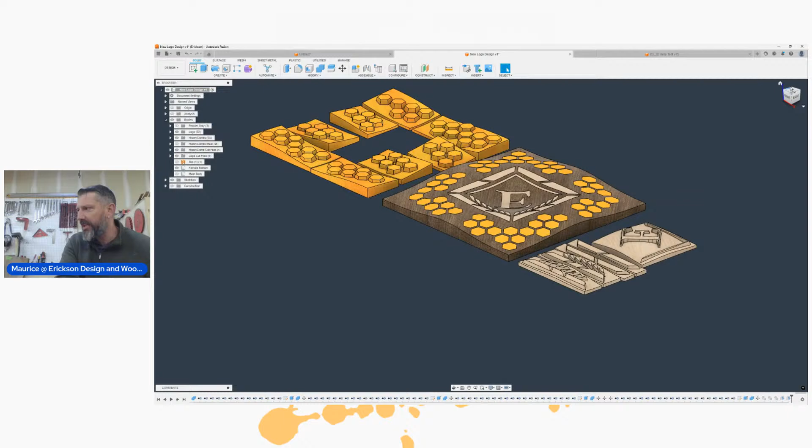I ended up redesigning my shop sign to make it look a little bit more organic. I'll share what this thing actually looks like now. What I ended up doing was flip the design where it's a triangle instead of a rectangular shape, and that turned out really well. I really like it.

That led me to a different design pattern for the honeycombs, and then I modified my company logo. What I ended up doing is making sure that all of this stuff would be machinable with my Bits and Bits engraver. This thing's super awesome.

It has two flutes, but the depth of cut is right around 0.5 of an inch, and some of these crevices are really deep. So I covered the workaround on how to do multiple step-downs to achieve that cut in Fusion.

There's a whole laundry list of stuff you have to take into consideration. It's all about machining these deep pockets, and this distance varies on all of the honeycombs. So there had to be a solution, and that video really did capture what that solution was going to be.

So that was good, that gets me back to where I need to be. When I get into the manufacturing side, I'm still working all the tool path generation and everything that's needed to do this. I'm almost finished with all the tool paths for the female body and everything that needs to go into it.

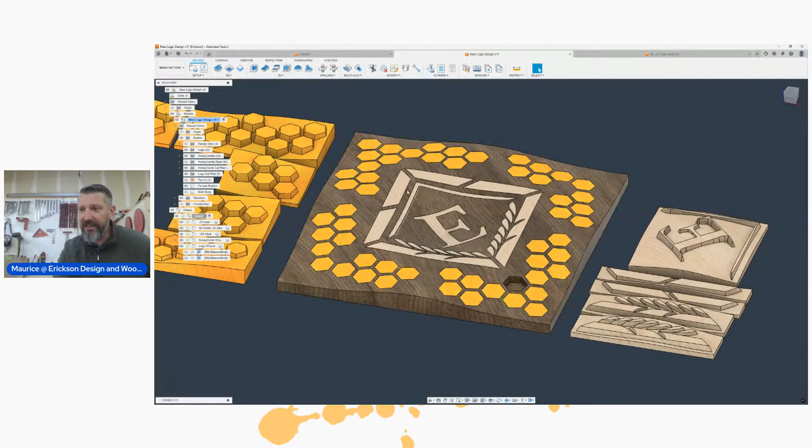Right now I'm about 10 hours for that cut. That is significant, that's a lot of time on the machine, not including all the other pieces that need to be machined. It's good, but...

That's where I'm at with that. But for this design-a-thon, I wanted to really look at how to make—I did that American flag puzzle, and I did a normal box for that.

I was thinking at some point I want to make a box that has an American flag that's wavy on top of the box for the lid, and then when you open it up, it shows the puzzle. For this design-a-thon, we're going to go ahead and make that box.

We'll do all the profile cuts and what that actually means. I'm going to use the same profile for the wavy surface as I did for the actual puzzle, so they'll mirror each other. So when you look at the box, you'll see the wavy flag that's completed and not puzzled.

And then when you open it, it'll showcase the actual puzzle itself. So we'll kind of walk through the design process on that.

Brooks, you asked about 2D versus 3D inlays—are the tool times much different? No. You're still removing the same amount of material, almost. In some cases you're removing less on the 3D design and maybe more on the 2D design, depending on what it is. But you're still just removing that material.

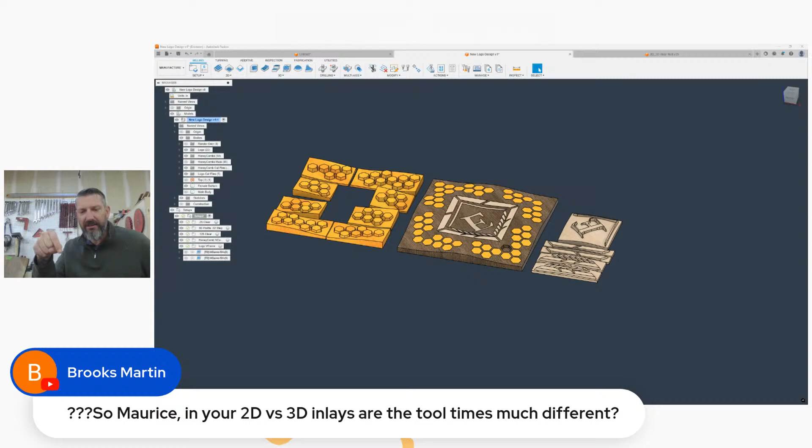So if you program your roughing passes with the pocket and then come around with that 2D profile, those machine times aren't really going to be that different. What's different is you have to go in and put that 3D profile back in. And as the tool goes back and forth with a really small step over, that's what increases the overall machine time.

So to do the profile on this, I think that was close to almost 6 hours. And this thing's pretty large, it's a 20 by 20 square. It's about three hours and 22 minutes, but you've got to times that by 2 because you end up having to do that profile again to cut the top off.

So yes, the 3D profile cut to get that surface, you're adding a ton of time to the overall project. Same way with the inserts, you're still cutting that 3D profile also. So the same bit, that ball nose coming in to do that 3D curvature, is still in there, and that still takes a bunch of time.

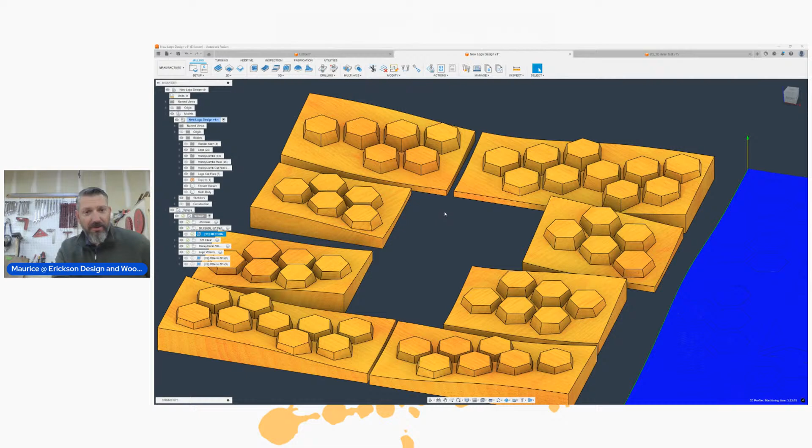So yeah, if you're going to compare overall, not just the pockets, it's considerably more. But again, it still looks really, really cool when it's done, and it's unique enough that you could justify a price difference based on the overall design compared to a 2D design.

In this case, for me, it's absolutely worth it, and I'm going to really enjoy hanging this on my wall when it's actually done.

Alrighty, so let's do something here. I'm gonna hide this, take this out, and go ahead and start prepping to look at this box design. Feel free to ask more questions throughout this, but I'm gonna start trying to get this design working.

Let's see, let's work on this. Let's find it here, I have so many different files and different drawings that it's hard to keep up with. Yeah, it's going to be this one. All right, we'll pull this up.

So this is the profile for the American wavy flag puzzle. Let me pull up the completed render. This is a pretty large file, there's a lot of bodies to this thing, so it might take a while to load.

There it is. All right, so each one of these is an individual puzzle piece that makes an American wavy flag. What you don't see here is any of the stars that are cut out. They're programmed into the tool paths based on a drawing.

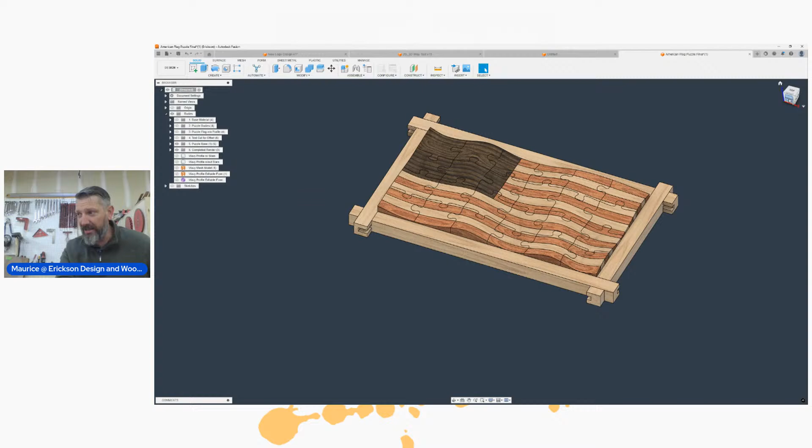So let's go ahead, we'll unhide this base. If I was to make this American wavy flag puzzle again, I know that the overall dimensions are good, and I made this before, and that's why the file is posted, and everything lined up extremely well within these parameters. So if I was to make a box, I know the dimensions for this thing to fit in.

I can measure everything off of this model, and it's going to be good. So if we know these are our known distances for what's going inside the box, really all I need to know is the dimensions allocated to these bodies, these renders, and then the overall thickness of my box walls that I want, and then the overall height for clearance. That will give me a good base for this to sit inside, and then also the lid to come down and actually look at this thing.

Let's go ahead and do some measurements really quick. The inspect tool is super awesome, I can measure an edge or measure points to get overall distances of what I'm looking at. So if I was to select this edge, it doesn't go all the way across because there's cutouts inside this. So if I click this point and this point, it will give me the overall distance of 14.5 inches.

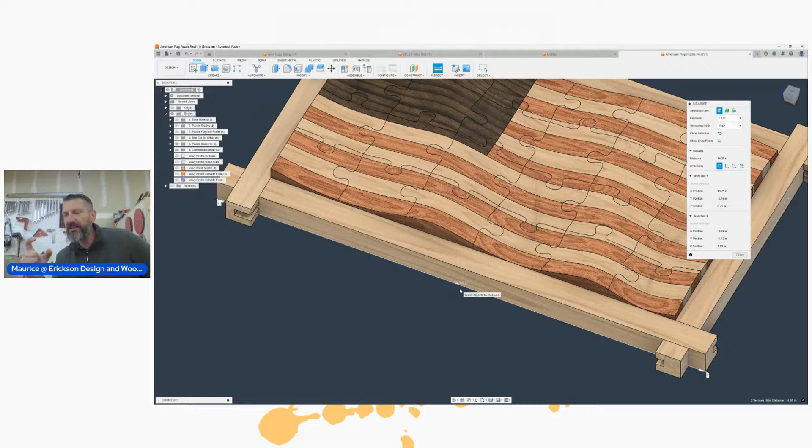When I draw these things, I draw specifically to known dimensions. And if I like this distance, it's easy to look at and understand how to design the box, not taking into account any tolerances. So if I was to design an inside box that was exactly 14.5, when I slip this entire thing inside of it, it's probably going to hit and it's not going to fit.

And what I don't want to do is start doing some beer math in Fusion 360 trying to account for that. The easiest method to make sure this box fits is when I make these inserts, I'm just going to take it to the table saw and cut it short. So I can still have really good dimensional material that I can design with, and then account for those tolerances later when I'm just trying to make it fit, and I can shave off just a little bit. You'll never notice that this thing was not exactly 14 and a half. If it was 14, you would definitely notice.

But if I was just to take a 16th inch off of this edge to make sure that this entire thing fit in that box, I'm good to go. There's no concern there, and you'll never notice it. Unless you're a perfectionist and you have a tape measure out and you'd be like, nope, this thing is not 100% the dimensions that you said it was going to be. There's some people out there like that. And unfortunately, you just gotta play with it a little bit.

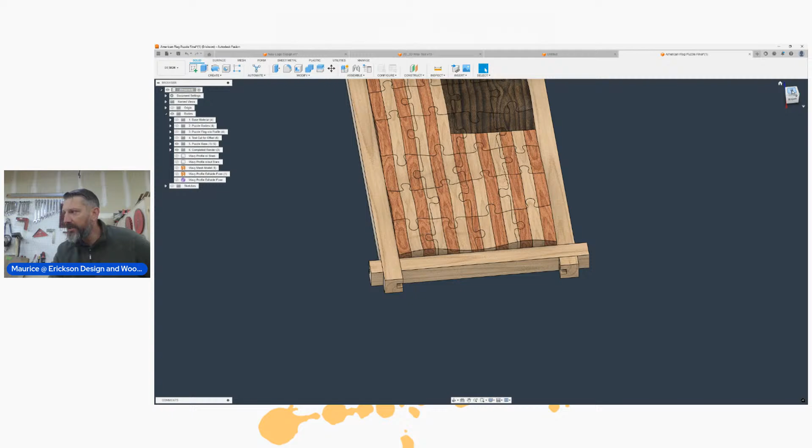So let's just go to the top view here. I'm going to create a new drawing, and we'll go ahead and hide this body quick. I'm going to hide these sketches. I had some stuff visible here. Let's work only off of this box. And you can see that the plane that I'm working off of isn't there. That'll be a little bit of a challenge later on once we start making sure the height differences are good.

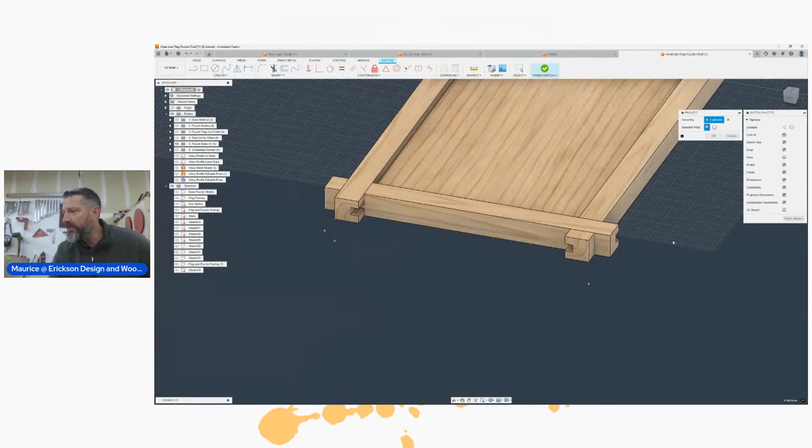But what we can do is project these points that I need to hit. So let's go ahead and select all these bottom edges. We're going to use the project tool, and I'm going to project this edge down to my sketch. When I click on it, you can see that there's a little icon there. Even though I'm above the surface, when you look down at it, it projects it down to your drawing. We'll do this one, this corner, this corner, just to get those dimensions here, and the last one. I'm going to hit OK on that.

I have to bring up this new sketch that I have. Okay, so now I'm going to hide these bodies since I know where that model is located. Let's draw a box, but I'm going to go from this point to the middle of that. Then I'm going to do the same thing. All I'm doing is hovering over it and then hovering over this point, and it will give me my center points along that edge. So there's my box, and we'll double check the dimensions. This should be 14.5, which it is. I'm going to hit OK. And the same thing for this, this should be 9. Yep.

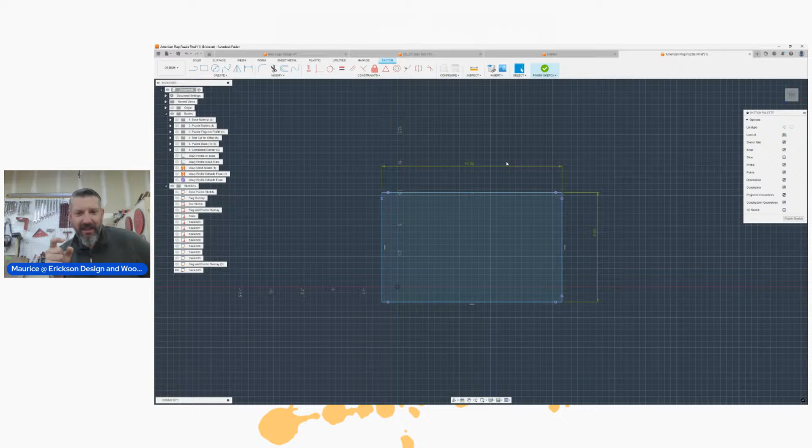Okay, so now another critical dimension that we need to understand: the overall thickness of the walls of my box, each side and the material that I'm going to use. I like to make the boxes 1/2 of an inch thick. That makes it really simple, and when I process the wood, I can hit that 0.5 pretty easy. I'm removing a lot of material. I'd like to go to like 0.75, but again, there's so much material there, and it's heavy, and it doesn't feel like a normal, slick box. So I like to use 0.5, and for this, that's what we're going to use.

So I'm going to go ahead and use the offset tool. I'm just going to select the entire box outline, and then I'm going to increase it by 0.5.

A negative 0.5, just to get outside the box. I'm going to enter on that. So there is my overall thickness and dimensions of everything that I need to cut. And I'm going to miter this, and what I can do is I can just put in the miters right now at a 45. This will be each side, each face of the material that I'm going to make in the garage. So now my overall distance of everything that I need to cut, whatever material I'm going to use, is 15.5, right? That's the outside of my miter cut that I'll do.

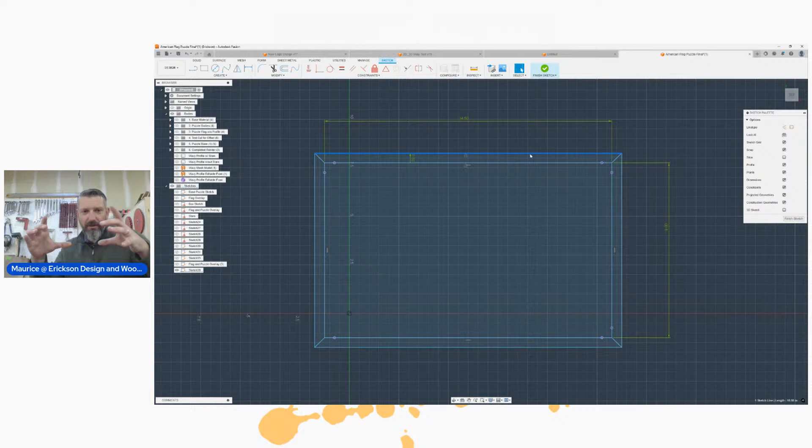The other thing that we need to figure out is how we're going to produce the top of the lid structure of the American flag and how we're going to input that into the box. And I like to rabbet and shoulder and do that type of joint where it slips right in and everything is held and all the edges are really good. So to do that, I'll end up leaving a shoulder of 0.25, and again, I can use the same tool that we did, the offset function, and I'm going to select all the corners again. And then I'm going to take this a negative 0.25. I'm going to hit OK on that.

There is my overall dimensions of the American flag that I need to hit to fit into those shoulders and that joint of that box based on the thickness being 0.5 and then enough distance for whatever I'm going to put in the box to go into it. So those are really the critical dimensions that I need to understand and design off of, which is good. So let's go ahead, and I like it. So the flag distance will be 15 by 9.5.

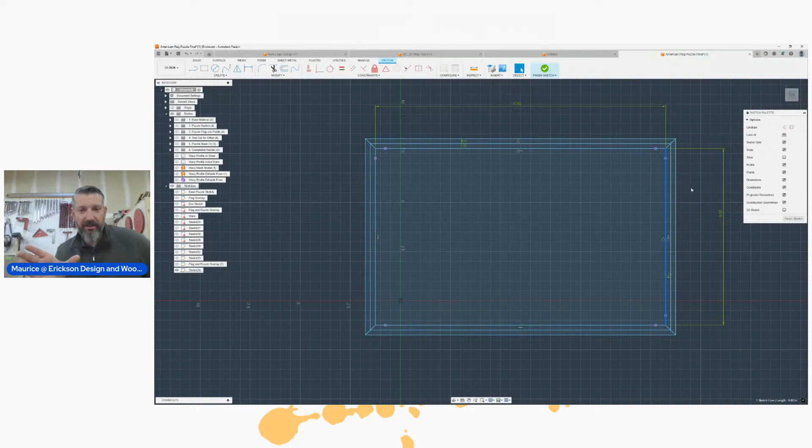And we've got to really think about how that interlaces. So the American flag will be visible on this line. So when the sides come up together on each side, and the rabbets are underneath, this is my show of the entire top of that box. So really, it's 14 and a half by 9. That is the overall dimension of the American flag that I need to make. So that is good. I like that. So let's go ahead and we're going to finish this sketch.

And now the second portion that I really need to understand is how deep I need to make everything, as far as the overall thickness of that box. If I remember right, what we can do is bring back the completed render of this. If I know this is my bottom, I can draw a sketch off of this plane. Oops, let's try that again. If I know this is my bottom, let's do, yeah. We'll just measure from this line.

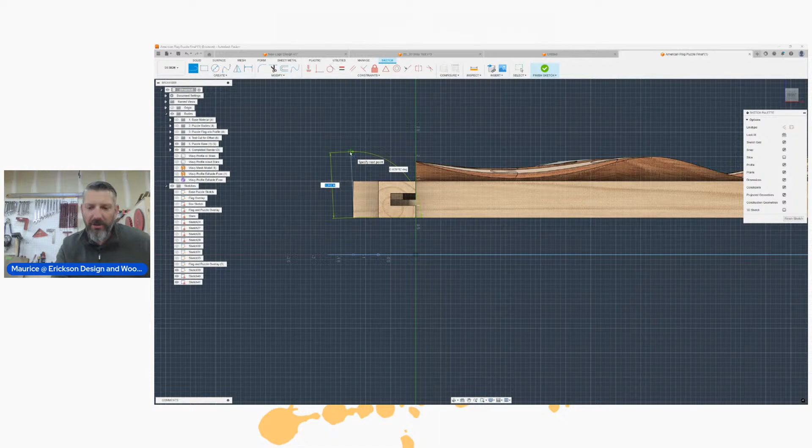So I need to understand that my clearance for this object to go into the box on the bottom side needs to be at least, I'm going to round up and say, at least 1.5 inches. What I also need to do is account for the box lid. So if I know my clearance, let's go 1.5. And then for the lid, I want at least 1/2 inch. Let's go 0.5 to the top of my lid. This gives me my overall dimension from this to the bottom.

And then what I'm going to leave, let's use 1/2 inch material for the bottom. Yeah, that should be fine. So the bottom portion of the box will be 0.5. The American flag, what I'll probably do is make it 1/4 inch thick. Well, maybe we should do more than that. Yeah, no, I think that's good. 0.5 plus another 1/4 inch. Let's do 0.25. So my overall thickness should be 2.75 as far as the depth of that box.

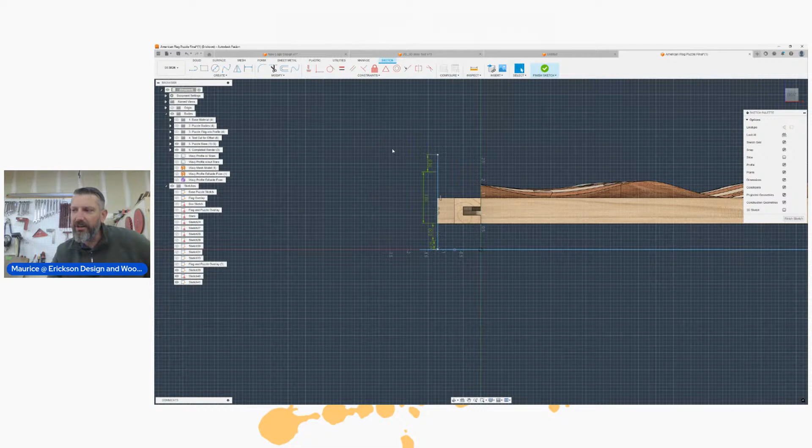So let's go back here. We can verify these measurements later, but 1.5 inches for whatever's going inside of it is probably good. I left enough material for the actual American flag to slip in, and then enough at the bottom for the base of the box, plus an additional 1/4 inch of material. So 2.75 sounds about right. So let's go ahead and we'll hide that sketch. We'll save that for later.

And then what I'm going to do is extrude these walls up. So I'm going to do both, this inside corner and this. That's my 1/2 inch. Let's just make sure I hit all of it. Yep. So we'll bring this up to 2.75.

And then we're going to make sure we click new body, and then this will be for the other side also. So that's 2 sides. Let's bring the sketch back up. Oh, I don't have my history on. Okay, I disabled my history. I'll have to go back in and fix that later. That's fine though.

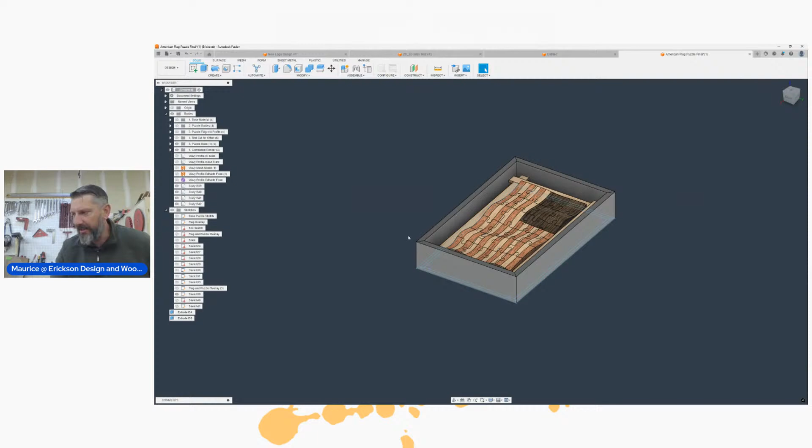Ooh, there we go. And then we'll do it for the other side. And this will all be new bodies. This will be 2.75. We're going to do new body. And same for this side. All right, we'll hit OK on that. And there is the walls for that.

Now for this thing, what we're going to do is we're going to concentrate on making the top portion and have enough room for each rabbet to go in, and we'll design that American flag. And then we'll put a wavy surface on it. And that should be pretty cool. So that is actually right where we need to be.

Again, these tolerances are really tight. I'll take my table saw and I'll whack off maybe a 1/16 of an inch. That will give me a 32nd on each side of clearance. Super good. For this, I don't have to do that. And that's really, really important. You know, if I was to put an additional 1/16 of an inch on this to account for that tolerance, then everything gets really wonky.

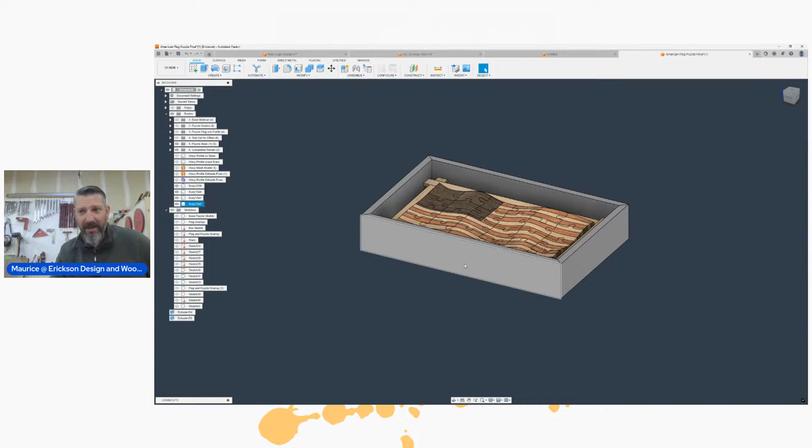And then when I get in the garage, I know that I gotta cut that. And it's easier to cut 14.5 than it is 14.5 plus a 16th, you know? So I'm trying to make life easier in the garage when I go through this. And for every action that I do here, I'm thinking about how I'm actually going to do this with the machines that I have and the capability I have in the garage.

That's really, really important. If I design something in here that I physically can't do in the garage because I'm missing a tool, that puts me in a position now where I'm going to have failure on the project, or I'm going to have to go buy something. And if I know the tools that I have in the garage, and whatever I'm working with is capable, I'm good to go. So I really keep that in the back of my mind when I'm going through this.

So let's go ahead. I'm going to hide this. Yeah, let's hide this and we'll just work with this now. Let's go ahead and yeah, I like it. We'll use this top portion. So now what I'm going to do is I'm going to draw a sketch off of this face. And then I'm going to draw a new box. And I'm going to go off of this point.

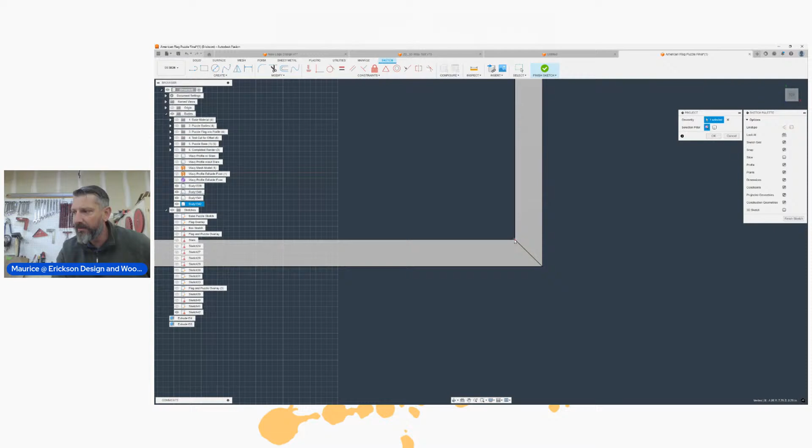And because I can't click on that point, I'm going to take this point and I'm going to project it to the drawing that I'm at now. So I'm going to use the project tool again. And I'm going to project this corner with this corner. Now I'm going to hit OK on that. Now I can snap based on the drawing that I want to this. And I like it.

So now what I'm going to do is I'm going to offset this 1/4 of an inch for the overall depth that I need. So let's go ahead and yeah, let's go 0.25. I'm going to hit OK on that. There is my shoulder or rabbet. That's going to go in and join those two together. And then, so let's go ahead and I'm going to hit OK on that.

I'm going to drop this down. I'm going to drop both down though. And I'm going to go down. Let's see. Did I say 1/4 of an inch? And let's do 1/2 of an inch. I think that's achievable, what we want. Yeah, I should really do, let's do 0.75. I'm going to run into what's going to get put inside there, but we'll fix that later.

I'm going to make this box just a little bit bigger. I'm going to go ahead and do new body, so it's not cutting into these corners. And that is good to go. So the overall thickness of the top of that lid is 0.75 of an inch. Now let's go ahead and cut this corner, but I'm going to hide these corners.

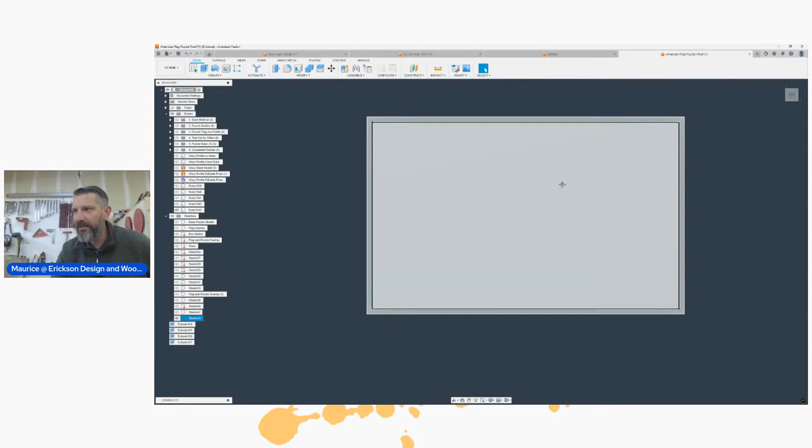So what I'm going to do is I'm just going to leave a 1/4 of an inch. I'm going to cut a rabbet, and there's going to be a 1/4 of an inch of material that's left over. So since I clicked this, let's go down 0.5 of an inch. That'll give me my 1/4 inch rabbet. All right. So let's hide the sketch. There's the top of my box.

Now what I can bring in is these corners. And what I'm going to do now is I'm going to cut that rabbet into each one of these sides. The easiest way to do this is I'm going to use the combine tool, and I'm going to use the cut function. So I'm going to click the cut, and I wish I could choose multiple bodies to do this. I have to do these individually, and sometimes it does take a while. But for this, there's only 4, so it's not bad.

So the target body that I want to cut is going to be each side of these corners. Let's see if it will do this. Nope. It will only let me do one. So let me select this. The tool body is going to be the top of this face. And what it's going to do is cut that notch that it overlaps into it. So I'm going to hit keep tool and then hit OK. Let's hide all this stuff, and we'll see what happened. So you can see now that it cut that into it.

Now, again, we talk about tolerances. All I have to do is just take that to my table saw and just shave the inside of this corner on this box, maybe a 32nd, maybe a 16th, and I'm good to go. I will never run into that. But for modeling purposes, I can butt this up and not account for any tolerance, and I'm still good to go. When I get into the garage, I got to really think about that.

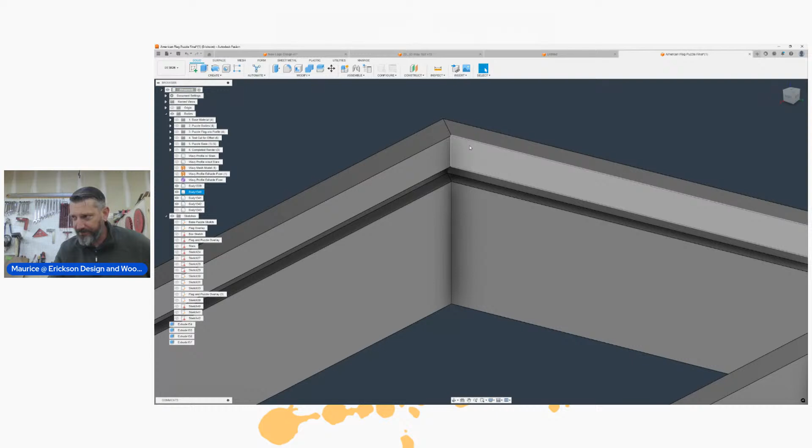Sometimes I'll use my dado. It all depends on how much time I have and how quick I can do it. When I go through the dado, it takes a while because I have a SawStop and I have to take out the cartridges, and there's a whole laundry list of stuff. But yeah, there is my 1/4 inch rabbet for my box lid to slip into.

Now let's make this look like an American flag. So I know those are my sides. I'm going to hide those, and now we're going to start working on this. So the American flag, let's see. There's 13 stripes. This is 9 inches that we got to work with. So let's do some beer math really quick. I'm going to create a sketch, and I'm going to use this top face.

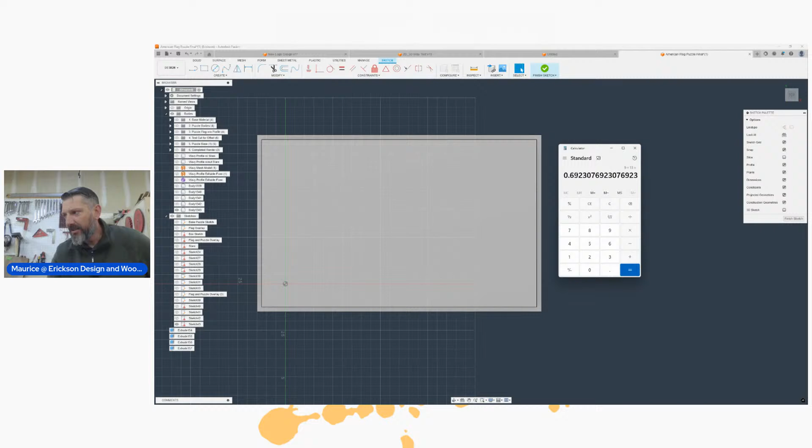And let me get my calculator out. Calculator. There's a generator online that will give you the exact dimensions of what you need to work with, but for this, we'll just do it on the spot. So I know I have 9 inches to work with. I have 13 stripes that need to fit in here equally spaced. So I'll take 13 divided by 9. That's going to give me, well, no, I did that wrong. 9 divided by 13. So each one of my stripes needs to be 0.69 of width.

Yeah, that's a hard dimension to get to when you have to cut all these stripes of wood out. So let's say that's going to be pretty close. Let's go. Yeah, we can use that dimension, and then I'll work around that a little bit. Let's go 0.7. And what I like, I have a drum sander.

I can't stress it enough to get a drum sander, because you can really control when you're removing material better than a normal planer. So if I need a critical dimension of say 0.7, that's what it needs to be. And that is super nice to have, and it makes it very easy. So yeah, let's do that.

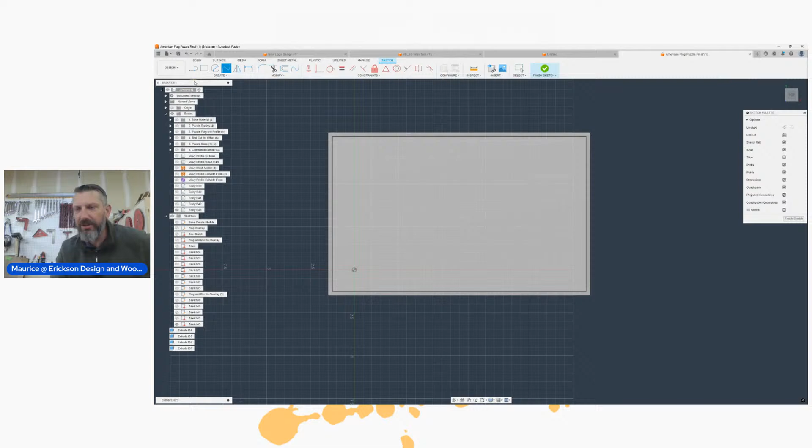So let's go ahead and we'll draw. Let's draw. Why isn't it clipping onto that? Should. Let's go back. Let me project this really quick. Project. We'll do these corners again. Oop. And yeah, I'm going to make just an overall box. And then what I'm going to do is I'm going to take this down 0.7. Yeah, 0.7.

Now what I'm going to do is I'm going to take my rectangular pattern function, and I'm going to click this box that I just made. And I'm going to bring these down. I'm going to evenly space these of 0.7. Oops. Don't want to go that way. I want to go down. And let's do 13. There's my 13 stripes. And you can see I had a little bit of overhang. That is very small, and it doesn't matter. So let's go ahead and we'll hit OK on that. Those are all of my stripes.

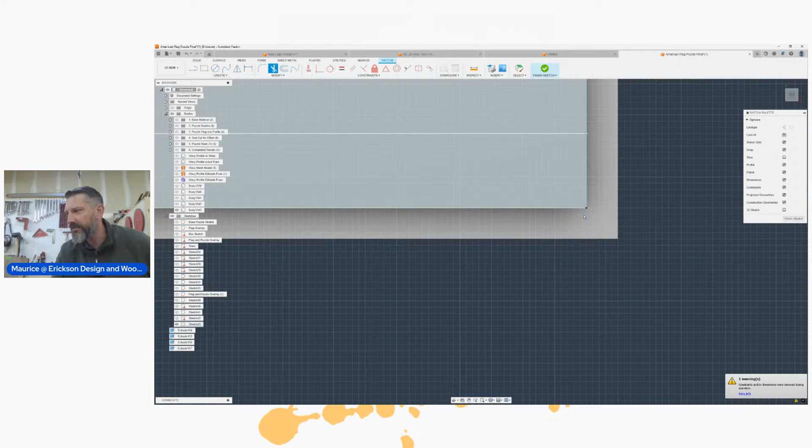I'm going to cut this off. So with the trim tool, whoops, go back to my sketch. With the trim tool, I'm just going to delete these out. We'll go back out here, and we'll delete. I'm going to exit out of that tool. Now what we need to do is I need to know what the dimension of the union needs to be. So let me pull this up. American flag dimensions. And then we'll do this flag calculator.

All right. So hopefully you guys can see this. Let me pull back up my main screen here. Oh, actually, give me a second here, guys. There we go. All right, let me pull this back up. Let's go.

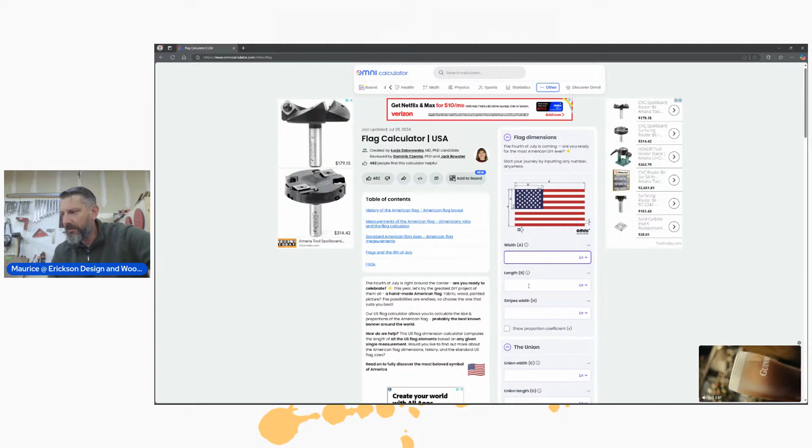What was that, 14.5? And my width was 9. So this thing, it's hard constrained, so I can't really control. So if I know my B value, that's 14 and a half. So the union should be 4.11. I'm going to go with 4 inches then. I'm going to keep it a whole number. You'll never notice that 16th of an inch difference. A lot of people struggle with that. And at the end of the day, you don't have to get too crazy on a lot of these things. So if I know my overall length needs to be 4 and I need to come up, let me just double check this.

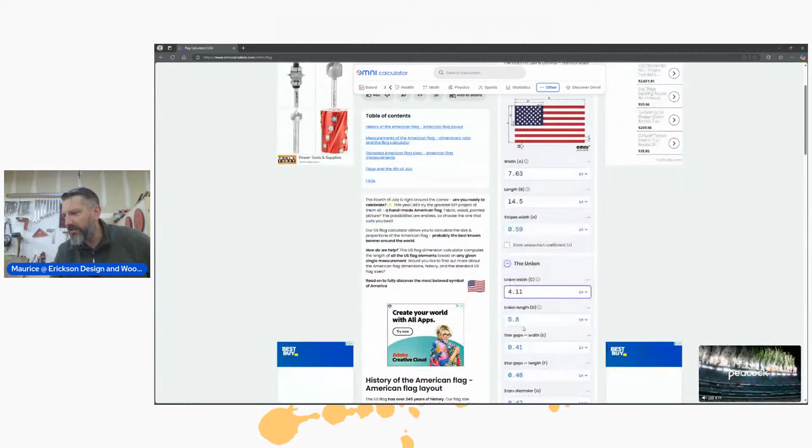It's 1, 2, 3, 4, 5, 6, 7. Well, on the 6th one, it needs to come down. So 2, 3, 4, 5, 6. So it needs to come down 1 more. That definitely does not look right. Let me exit out of that. Let's see. 14 and a half, and it's showing the union length, that's what it is. So this is the dimension that I'm looking for. 5.8. If I'm at 14.5, let's keep it at 5.75.

5.75. Not that one. Let's try that again. 5.75. Oh, this thing is kicking my butt. I don't know why I'm doing that. 5.75. All right. And that should give me 1, 2, 3, 4, 5, 6 with 7 on top. All right. So I'm going to click that corner. And then I'm going to go ahead and delete these lines. So let's go ahead and we'll take this out, take this out. I'll delete each one of these.

Get out of that. And then, yeah, this should be good to go. So there's my union, and here's all the stripes that need to be put in. Still kind of looks funky to me.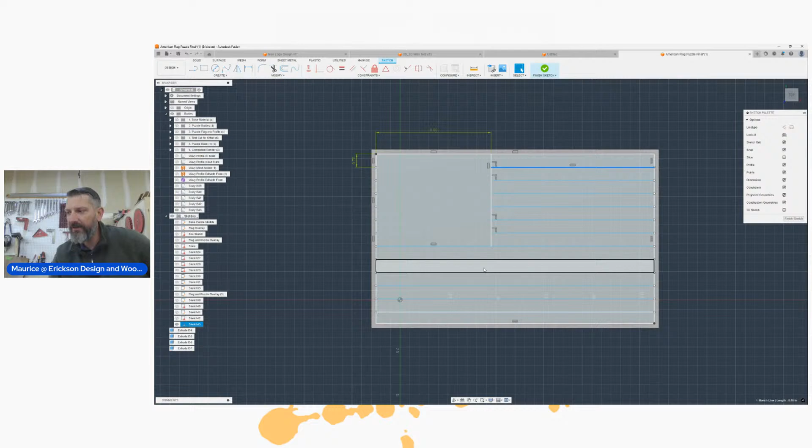5.75. You know what? Let's go 6. I like that, make it a little bit longer. So if that's 6, then each one of these lines will be 8.5. So 8.5 for these widths, 14.5 for these stripes. And then the overall distance of the union is 6 by...

4.9. Okay, I like it. So that is the overall distances of each one of the stripes I have to make in the garage, plus the union.

Let's go ahead and we'll finish this sketch. And then what I'm going to do, to make it look like the American flag, that way everybody knows what we're making here, I'm going to go ahead and extrude these downwards.

Actually, there's an easier way to do this. So let's go ahead, we'll click all these, it's fine. And then we're going to go down 0.75 or 0.5. I'm going to cut those out, and I'm going to pull my drawing back up, and I'm just going to extrude these down. And I'm going to show you why we're doing this.

Oh, you're saying, okay, yeah, that makes sense. So we can go every other one. These are all new bodies. Oh, I'm going to repeat. I'm going to do that again.

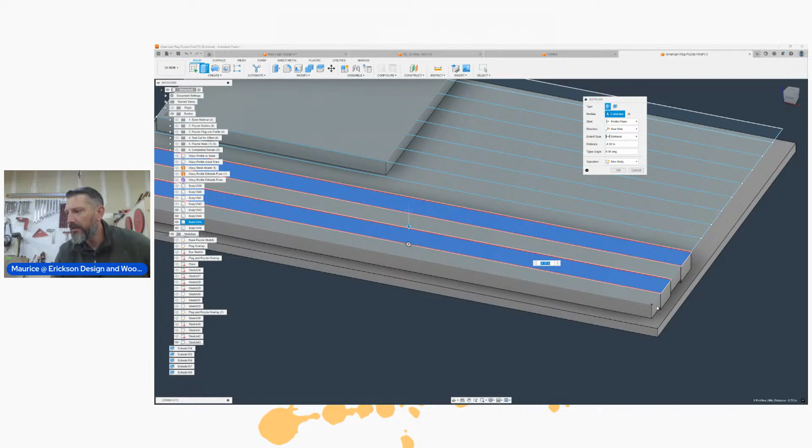New bodies. Let's go 0.5 down. New bodies. Oh, I didn't go far enough down. Since I don't have my history turned on, I can't go back and do that. So I'm going to hit the edit undo button.

All right, let's do every individual star. Let's do it this way, this will be a little bit quicker. Go down to negative 0.5. And these are new bodies.

I'm going to repeat the extrude, and I'm going to do these stripes. We'll go negative 0.5. We'll do new body. And we'll do the same thing for the union.

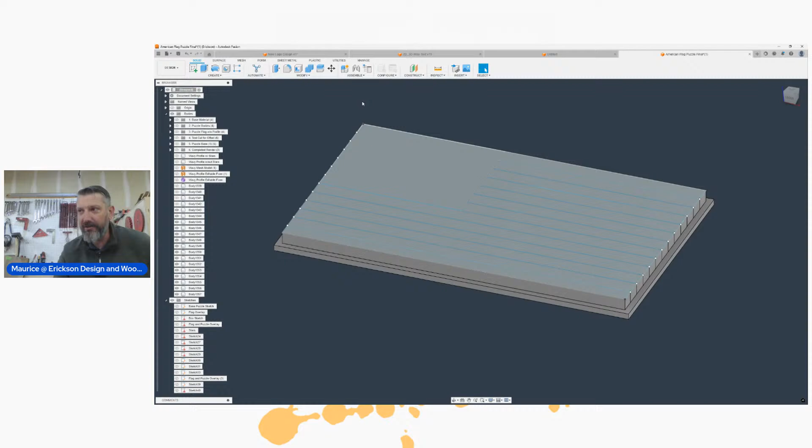All right, let's get some material. So the reason why I didn't join all this together onto this bottom is I'm going to put a veneer backing. That way you can't see the stripes on the inside of the box, and we'll kind of look at that a little bit. It only has to be a veneer sheet, you don't really have to do anything crazy.

Let's see, yeah Brooks, that's exactly what I got too. And just to make life a little bit easier on me, going that 0.25 difference for the union to get the 6 inches really does help minimize the amount of mistake that can happen when I'm cutting all this material out on my table saw. Same way with the 4.11. And because I increased the distance here, and it's a little wonky, but it's so close that you really can't - you'll really never notice it unless there's a purist there who'd be like, yeah, your dimensions are off.

I haven't run into anybody like that yet, but you never know. So I'm taking a little bit of risk and getting outside the regulation dimensions of that flag. But again, can you notice it? Is it something you've got to really pay attention to? It's hard to say. But let's go ahead.

I'm going to hide all this sketch drawing, and then let's go ahead and put some material on this, some appearance. And yeah, that's good. So let's put walnut in.

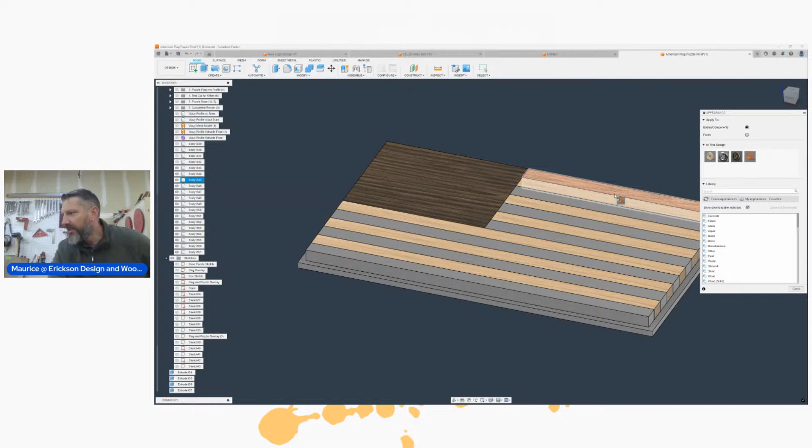And then we'll come in with the cherry. I'm going to use Padauk because it gets a really nice red color. But for the design portion in here, this appearance, it's easier on the eyes to use cherry, and it looks like a contrasting red color.

Now what I'm going to do is I'm probably going to use a darker veneer on the background or the bottom of that lid. So if I know that I'm going to veneer this, I'm good to go. So let's go ahead and let's pull up the sides of the box again.

And for the box, we'll use maple - I'm going to use big leaf maple for the outside of this box. It's highly figured, it's super nice. I need to input the textures in here that shows all the figured wood that I have, and I need to eventually do that at some point.

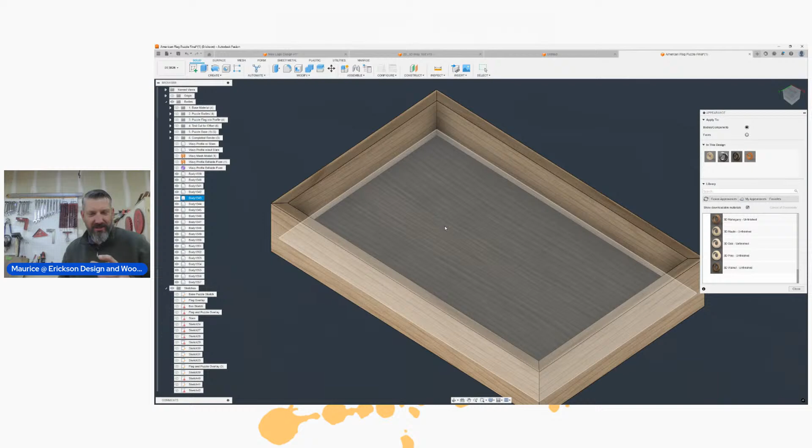But so the inside of the box, when you flip the lid open, you won't see that American flag. It'll be whatever material that I use to veneer it, which I like - I don't want the American flag to show on the reverse side. There's going to be no stars on it, it's going to look wonky. And so veneering takes all of that out, I don't have to worry about it.

All right, my coffee is cold, so I'm going to graduate to a Red Bull. I like to drink energy drinks when I go through all the design work because it keeps me focused.

Okay, I'm going to hide all the appearance stuff. Let's go back. Now, the critical thing is I know all the dimensional material that I need to cut by material. So the Padauk, I know exactly what these dimensions need to be to fit inside this box. I know what size the union needs to be, and then all the white stripes for the curly maple that I'll use.

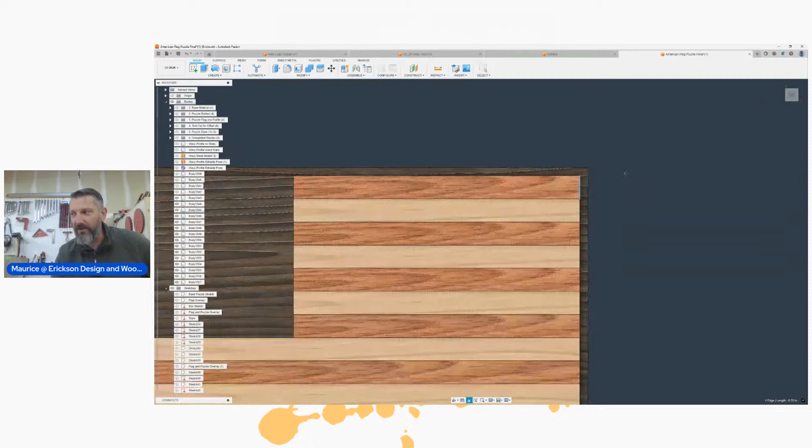What's not accounted for is this additional rabbet that I accounted for. So let's hide these sides. Technically, I need to account for this 0.25 in this distance on both sides. So this top portion, if this is 0.7, I need to add 0.25 on this side and on this side to account for when I machine this rabbet into it. Same way for this one, if I cut it 0.7, I need to add to the overall length of this 0.25 rabbet that I'm going to cut. So I got to do that for each one.

So I'll have to take really good notes, and when I get in I'll account for it. Technically, this will be the overall dimension for all the widths from this point to this point. And then when I do my veneering on the back, you won't see the actual stripes, but this will be stripes technically. So I don't really have to model that unless I want to. For this case, I'm already accounting for it, and I took that mental note. I'll know that this stripe is 0.9, or 9 inches of length, that I got to cut, and then I got to account for an additional 0.25 for this thickness.

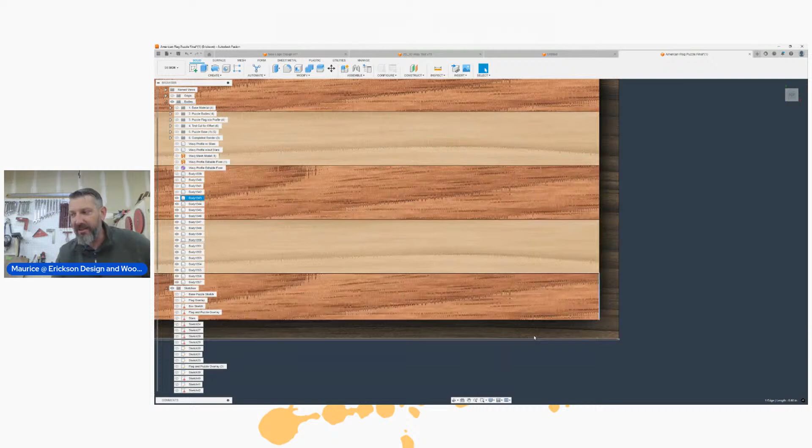Everything else maintains its 0.7 distance all the way down, except this one, and this one actually got kind of wonky. So if this was 0.6 plus 0.25, I got to make sure I machine that to 0.85 width, and then get my overall distance or my length on that. So I hope that kind of makes sense. I took a mental note of that where I have to do that in the garage.

But that gets me to my box. Now the fun part: I'm going to machine a contour all the way on top of this so it's wavy. To do that, I'm going to use this mesh that I already have, and I'm going to scale this to where it will cut the profile of this on this box.

So what I'm going to do is I'm going to copy this. I'm going to right click, let's copy, I'm going to go back. I'm going to paste this in because I don't want to mess with it — this is associated with other cuts, and I don't want to mess with it. So I just made a copy, and then what we're going to do is I'm going to position this.

Just touching that top surface. Same way with this, so that is technically good. I'm going to hit OK. Actually, let's go with top view, and let's get this centered into the material. It needs to come in. Now it looks about right.

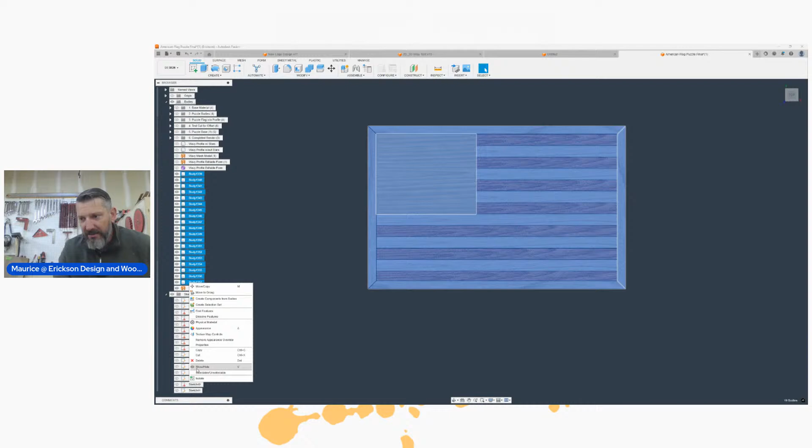So what I'm going to do now is I'm going to hide all of this stuff. Let me highlight all of it. Let's go ahead and hide. What I'm going to do is I'm going to scale this. So let's go to modify, we'll go to scale. Oh, why wouldn't you do it in the middle? All right, that's fine.

Let's bring this back. Unhide this. Of course that wouldn't do it. Actually, let me do it with a sketch. Not that one, this one. Let's see here. Man, I can't select that base.

It's fine, there's an easier way to do this, but for this let's just do this. So let's go ahead and we'll scale this. We'll hide this base so I can select it, and then we'll pull this drawing back up. All right, let's scale this thing. That's going to be pretty close. Let's move this.

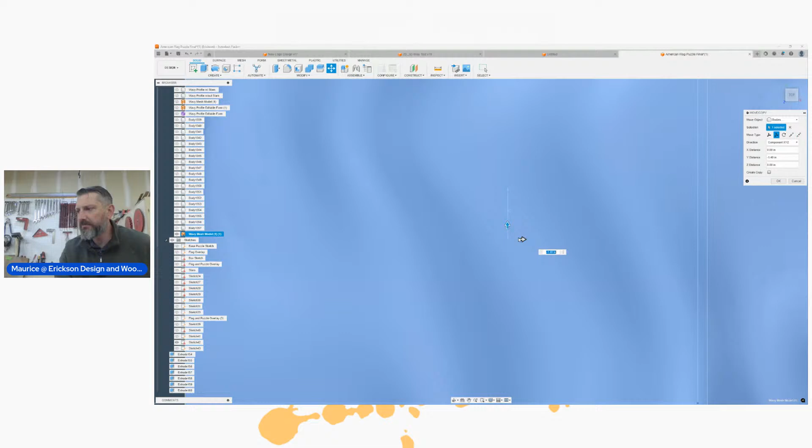Ew, yeah, see I got really wonky with my measurements here. All right. Hit OK on that, and then we're going to scale this one more time. Hit OK on that. And this thing got really, really wonky. You know what? I think that should be fine, because right now I'm just looking for the profile.

All right, let's go ahead and let's bring all of our bodies back up. We'll unhide all this. Ew, look at that. Little too big.

Hey, what's up, John? Appreciate you joining us.

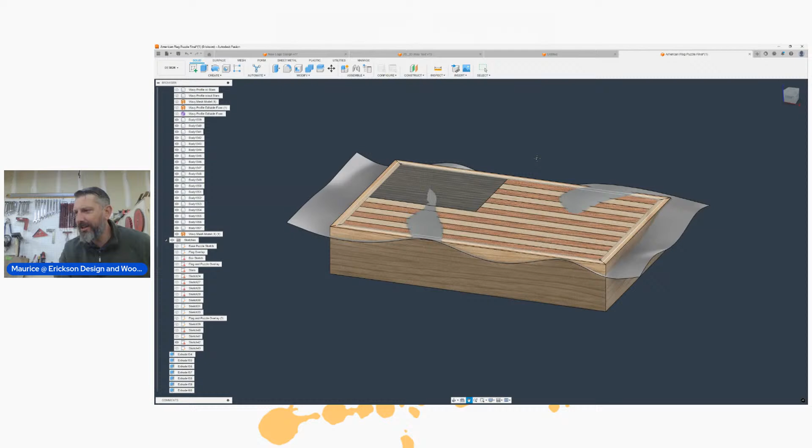Right now we're trying to make a wavy flag box, almost there with it. So I'm going to bring this down just a little bit because I don't want to cut the top portion. Go a little bit more. Let's bring this down just a little bit. I think that's the closest I'm going to get.

All right, let's check one more thing. Let's hide these boxes. And let's see, ooh, look at that. That is not going to work. Okay.

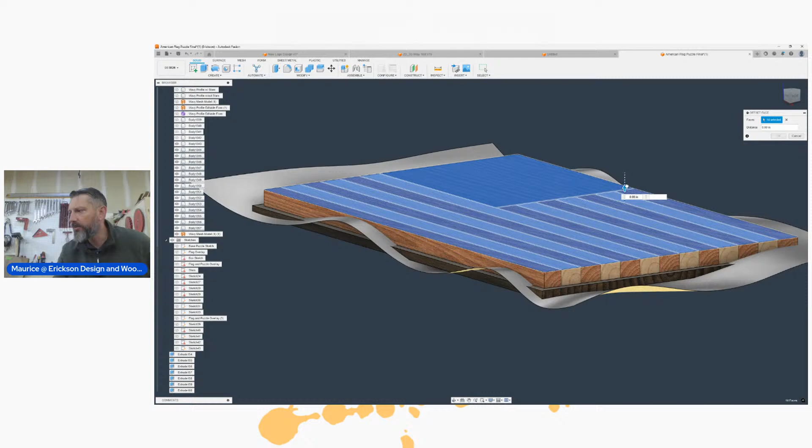Let's do something here. Let's increase the overall distance. Let's use the push-pull method and go 0.75 up. Still achievable. We'll hit OK on that.

Now let's go ahead and move this. Let's go ahead and move this back up. Yeah, let's go ahead and stop it right there. All right, I like it. Let's hit OK on that.

Now, before I cut this into everything, I'm going to pull this box back open, and I'm going to hide this mesh. And I'm going to pull the sides of my box now upwards, and go to the top of this box distance. Because remember, I still want it flush.

So let's go to object. We'll use this face. Distance to object, there we go. Oh, did it join everything? It did.

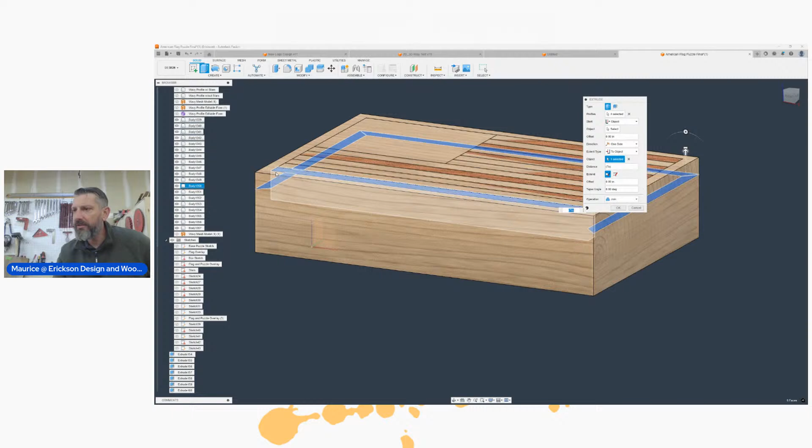Cancel. We'll use the push method instead. So let's go ahead and pull this up, and we'll go 0.75.

All right, now what we can do is let's cut this profile into it. So to cut this profile, we'll use the split body, and then we'll select all the bodies that we need to split. So I'm going to use, let's do these.

We'll select the sides, and then we'll hit OK. Oh, actually, before we do that, for the splitting tool, we'll use this profile.

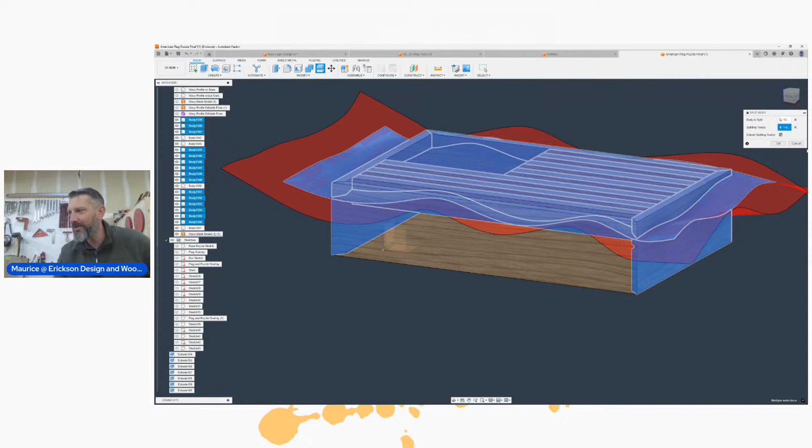All right, now what we'll do is I'm going to remove the reverse side of this. So let's go ahead and delete. Oh, I didn't select the... Oh, that's funny. All right, that's easy.

Let's do this and this, and then the same profile, and then we'll delete these two. Delete, hide the mesh, and there is our wavy box lid.

Now let's check the sides here. So actually, let me get organized. Let's go ahead and do wavy box. Cancel on that. Wavy box lid.

And I'm going to dump all of this in here. We'll put this all in that folder. Okay, so let's hide these corners, and then we'll see the box lid.

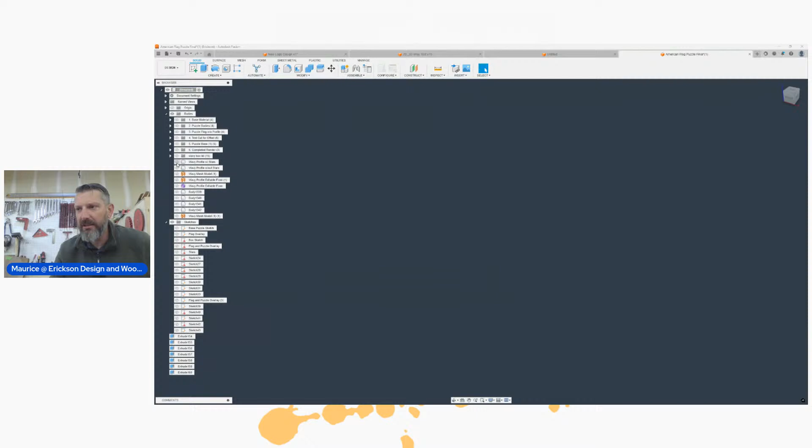And then let's go ahead and hide that, and we'll look at what we need to make for the sides. So there's my dado, and there's the profile that I need to cut. So when I go into the CNC machine, I'm just going to machine the sides of these boxes for each one. And then later I'll take it back to my table saw and cut the miters in. So technically, let's look at it from this side.

Let's select this, and I'm going to rotate this 90 degrees. That is the part that I will cut on my CNC machine. So the dados, since I'm probably going to use a quarter end mill to cut this profile out, I can do both. So there's the sides that I got to cut.

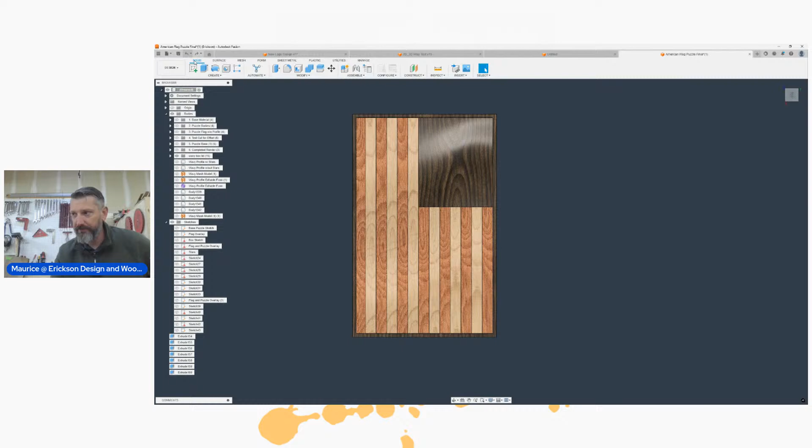The dado, or basically the plug to go in and do the shoulder, that's the part that I need to make. And then we'll have the profile. Let's go back. Bring these back, excuse me. We'll bring these back.

And there it is. Now, I added a bunch of material in here, so I got to look at my tolerances for this box. I'm probably going to have to bring these up just a little bit, increase the overall depth of the box, just to make sure whatever's fitting inside of it fits. And we can do that pretty simply. But I like it, and that's actually a really cool profile for that box.

That should actually look really cool. Now what we need to do is identify where we're going to cut this box out. So let's go ahead and bring the puzzle base and the completed puzzle back, and we'll see how it interacts with this. Let's hide the box lid. And yeah, it looks pretty good, looks like it's going to fit pretty well.

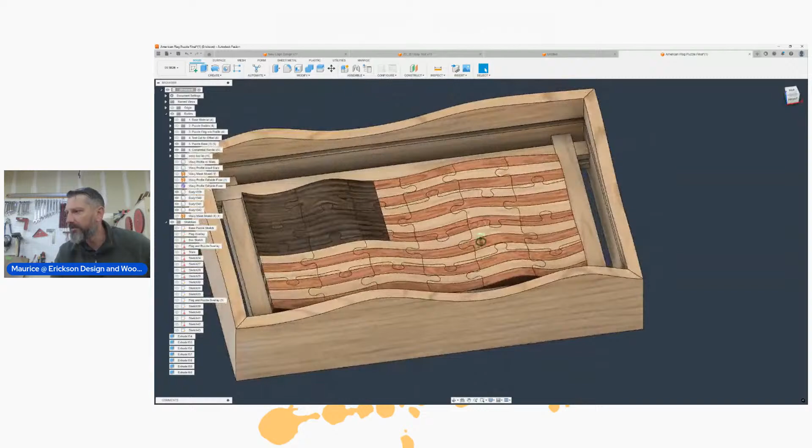Okay, it needs to come down. So let's go ahead and cut the top of this off. What I want to do is leave at least a quarter of an inch from the top of the lid, the bottom of the top of the lid. And that just gives me a little bit more clearance because this is a hard edge. And the base, or the top of the bottom side of that lid, that's the bottom right here. So let's cut that quarter of an inch down from that.

So there's a couple ways we can do this. The easiest method, and what I'm going to do, is hide the puzzle pieces, and I'm just going to go ahead and make a construction plane. And I'm going to use this right here, and offset it by 0.25.

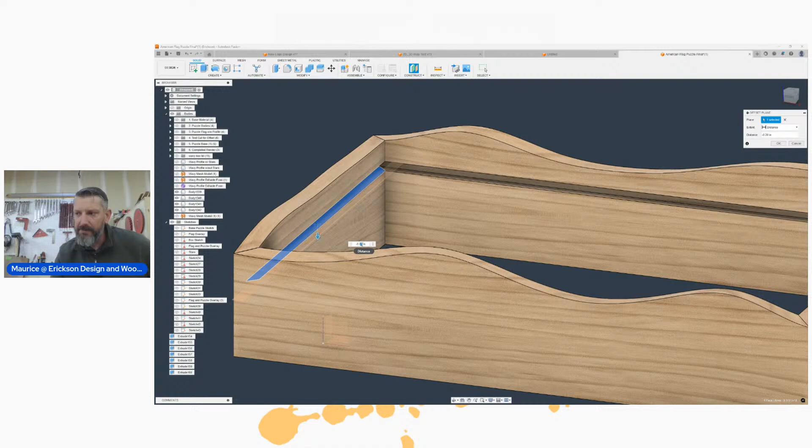I'll hit OK on that. Now, what I can do, let's do split body. I'm going to select the bodies that I want to split. Let's see if this actually works. And then the plane, I'm going to select this plane if it lets me. No, that's okay. What's the easiest way to do this?

Let's do split face. That's what we want. I don't know if this will work. Oh, that looks like it will. Let's do that. Nope. That's okay. All right, let's do this. I'm going to copy these. Let's make a copy. This is probably the wrong way of doing this, but there's always more than one way of doing something in Fusion. This might actually be the best method.

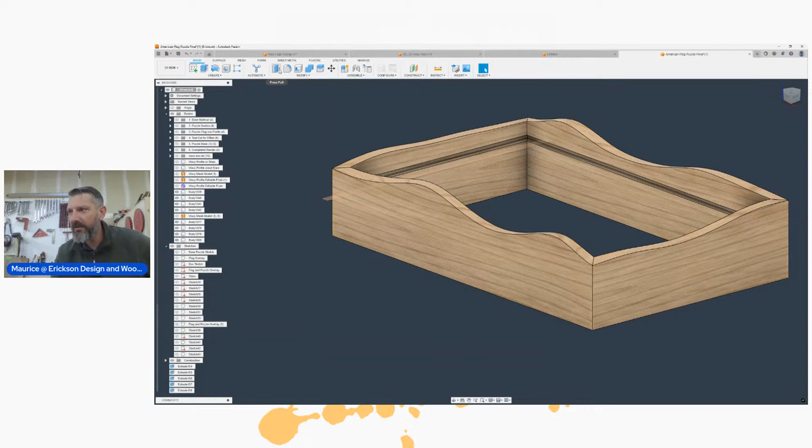Let's go ahead and hide this, and then we're going to push. Let's just push these corners. Oh, no. Let's do cut. So I'm going to cut these out. So the distance, but for the extent type, let's go to objects. The object is that plane, that offset plane that we created. So if you can see, it's still here. So it will go to that distance. And we'll cut it. All right, let's hide this plane.

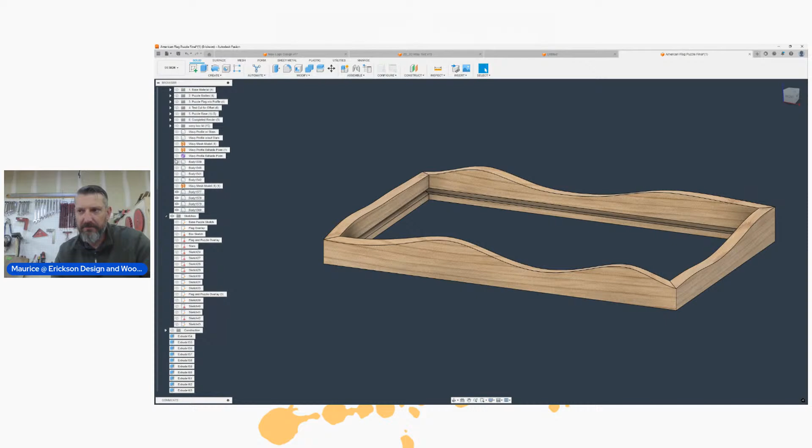And then what I'm going to do now is a combine, and I'm going to cut this. Oh. Actually, let's use this tool. We'll cut this target body with the tool. I'm going to save it and do the same thing. Target body is the main base. Tool body will be this profile. We'll repeat. Target body, top portion. We'll repeat. Target body, tool body, and then we'll repeat.

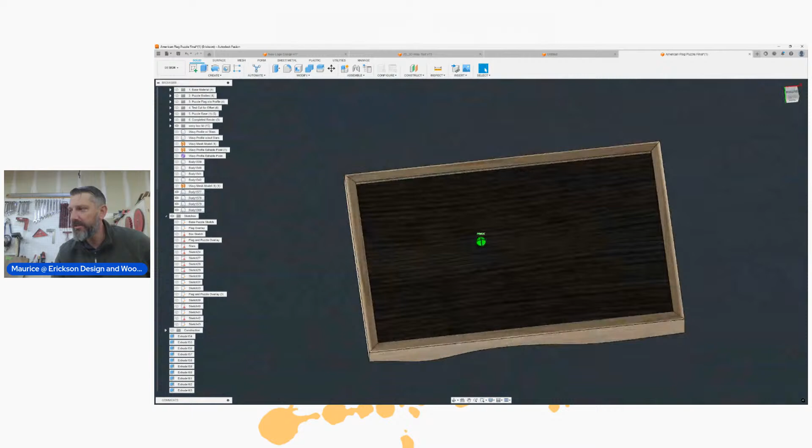Okay, let's hide. So there is my base. Here is my lid. And here's the topper of that. So let's hide this base. So that's effectively my lid for that box. And I left a 1/4 inch of material here. That'll be the friction as it comes down, because I'll put inserts into the box. I would technically make this a little bit smaller or a little bit larger, just so I have a little bit of ceiling to work with for the box. But for this, it should be okay. Really like that profile. That actually turned out pretty cool.

And then let's pull the puzzle base back up and see if it hits. Easiest way is to do section analysis, and we'll use this face and bring this in. So let's look at it from the right side, and you can see I am definitely hitting. Oh yeah. Well, it's close. Definitely hitting the backside. Ooh, man, that's close. Too close for comfort. So I know this thing needs to come down. Let's cancel that. Let's hide all of the section analysis stuff.

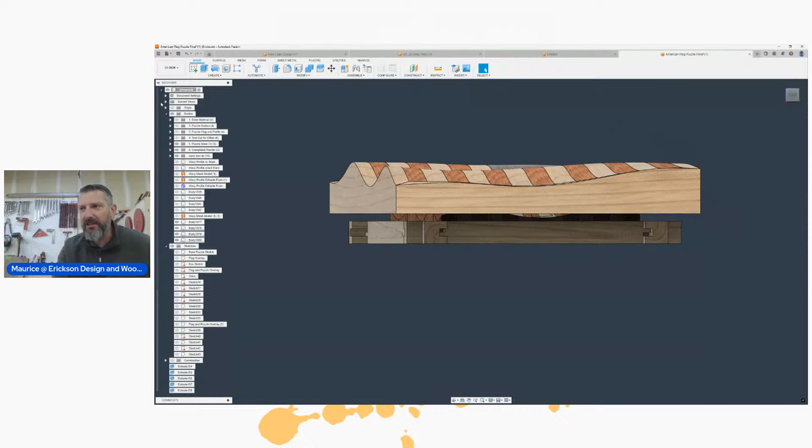Okay. So we'll bring this lid up just a little bit. Actually, let's pull this bottom back up. Let's measure the distance here, see how much room I have. So 0.75-ish. Yeah, I'm going to end up bringing this down just a little bit. So let's go another 1/4 inch. Let's bring this box down 1/4 inch. So I will extend them. Let's go 0.25. 0.25.

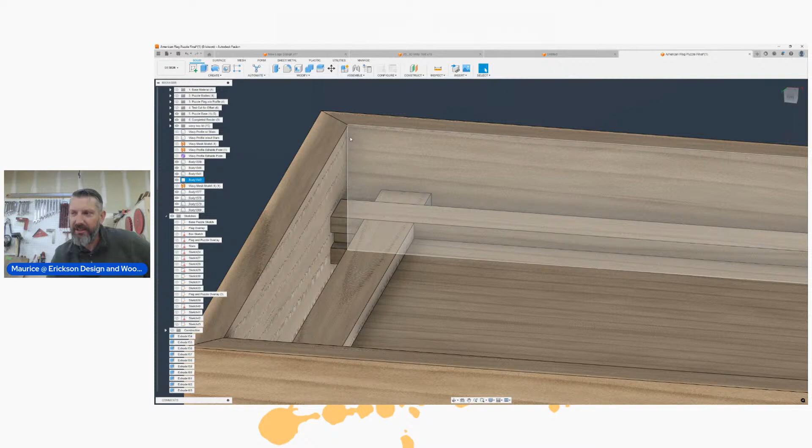And then the bottom of my lid. Okay, so we'll look at it this way. This is the bottom of the box. I'm going to leave a space here from the top, and it's going to be a 1/2 inch thick bottom that goes in here. So if this is 0.25 plus another 0.5, that's 0.75 distance I need for this thing to sit inside of it. As long as I don't break that dimension, I'm good. And this is an inch. So that's perfect. That gives me 1/4 of an inch of the puzzle piece structure when it goes into the box. The top portion is 0.25 from the top. So I am 100% good as far as my clearance.

I probably didn't explain that correctly, so let's visualize this a little better. I'm going to make the bottom of the box here. Actually, let's do a construction plane off of this face, and I'm going to come down 0.25.

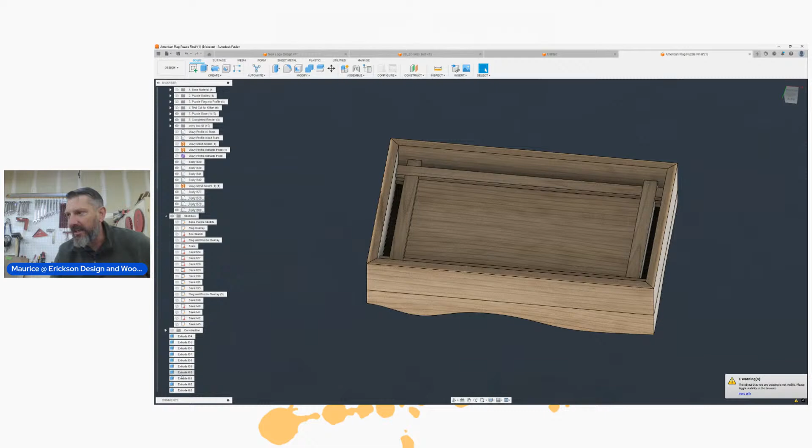I'm going to unhide that. Let me, so that's technically 0.25. That gives me my clearance, and that's going to be where I start that, the bottom of the box. Let's go ahead and we'll do a drawing off of that plane. And what I'm going to do is I'm going to use this inside corner again. So I'm going to project that because I can't snap to it from where I'm at on my drawing surface.

I'm going to hit OK on that. So now what I'm going to do is I'm going to draw. And then I'm going to offset that by 0.25. That gives me my rabbet and shoulder joint. And that looks super good. And so let's go ahead and we'll finish sketch there. Now what we'll do is I'm going to hide all this stuff so we can visualize this a little bit better.

Still on the bottom side here, so I'm going to extrude downwards. So the overall distance of this is going to be 0.5. And then I'm going to bring back my sides of the bottom of this box. And I'm going to go ahead and I'm going to cut this into that to give me my joint. So we'll use the cut. My target body will be the side of each side. The tool is going to be the bottom of this.

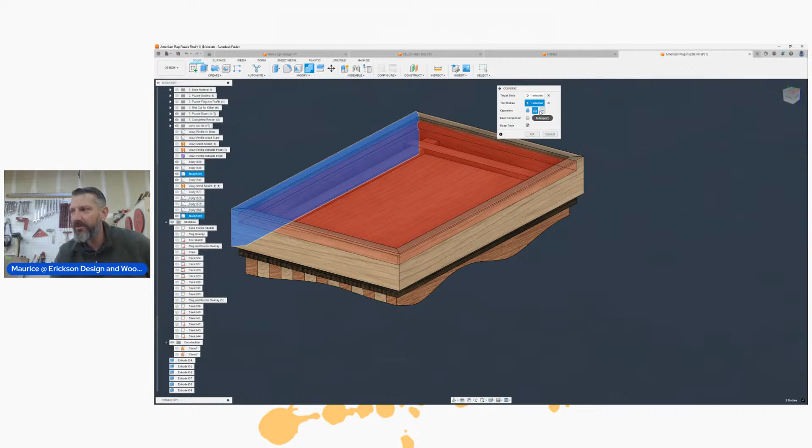And what I'm going to do is I'm going to cut. I'm going to keep the tool. And then I'm going to do the same operation for all of these sides. Let's do repeat. Tool body. We'll repeat. Repeat. All right. Now what I can do is I can hide this bottom of this box. And there's my dado cuts that I need to make, still leaving me 0.25 distance of the bottom of this. All right, so let's go ahead and go back. I'll bring this back in.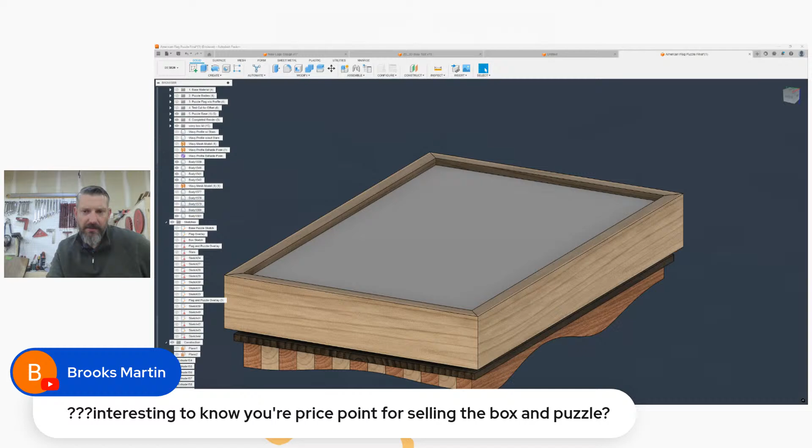Brooks, let's see. Interested to know your price point for selling a box and the puzzle. Yeah, oof, good question. It's a really good question because the original one that had just a normal box, let me pull up a picture of this thing. There was a lot of work on this thing, a lot of material. Let me pull this thing up, if I have a picture of it. I know I do. Yeah, here it is.

Okay. I sold this for, with the box and the puzzle, everything. I sold that for, I think it was for a friend, so I cut him a deal, and they gave me a tip over it. I would probably be at the price point of $600 on this, and because I have to use so much material and I'm wasting so much material, the padauk costs, the curly maple costs, these veneer inserts cost a lot of money. So the overall profit margin is still above 100%.

But like material costs for this box alone with that big leaf maple, I mean, it got around almost $300 to $400 worth of material just to create that box. The price point on the veneer compared to the padauk and the curly maple and the walnut is almost on the same lines to recreate this for the flag wavy top of that lid. So the price point probably would be at the same price, and you got to find the right buyer that would look at this and commit $600 to this overall piece.

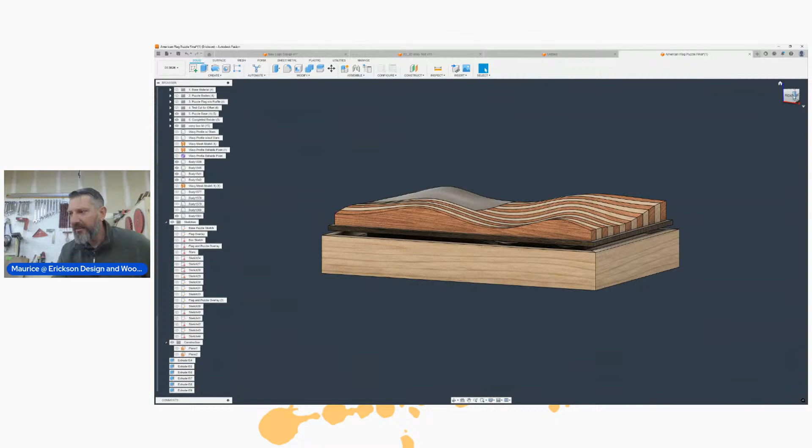Let me put some appearance on this, and then we can visualize this just a little bit better. Let's do a walnut base. We'll close this. Oh, this thing is just not working right. All right, let's hide this top of this box. I like it. It's getting there. Let's do one thing. I'm going to drop this down. The easiest way for me to do this is to move everything as one. So I'm going to pull everything back up. Let's pull this back up. I'm going to hide. I need to go 1/4 of an inch.

Let's get rid of the... Okay. So what I'm going to do, I'm going to highlight all of it. And let's just verify I hit everything. I need to highlight this. Okay. That's good. This is good. Everything is there. Yeah. All right. Let's move this 1/4 of an inch up.

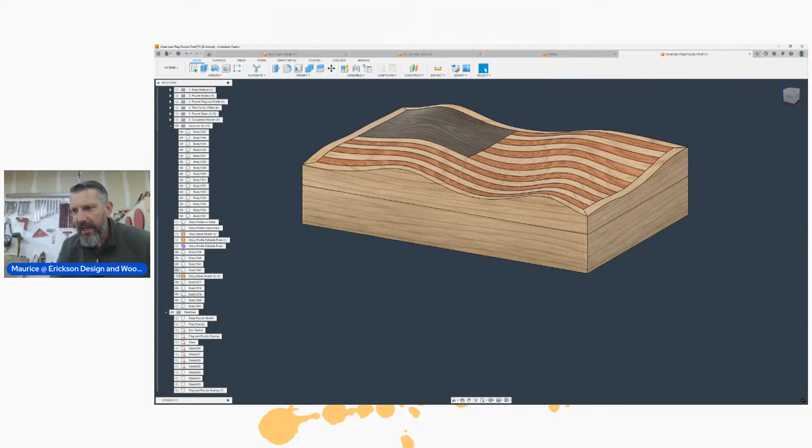0.25. I'm going to hit OK on that. Now let's hide the box lid. Bring that base back in. And then we'll sit the puzzle in. And right now the puzzle, yep, it's aligned with the base of this. So let's do some section analysis to see exactly where we landed.

All right, let's do inspect. We'll use this face, and then we're just going to come in. Let's hit OK on that. And then let's look at the clearance. So everything is in there, which is great. I have all of the tolerances correct. Everything is lined up, and I have enough clearance to where that box will sit down and it's good to go.

Let me bring back John's comment. Let me make sure that I understood that correctly. That was when you were trying to figure out when the lid had missing area on the... Oh, okay, I got you. Yep. And honestly, John, what I would probably do, I would spend a little bit more time with this profile to make sure that it matched the profile of this. This is the same profile of the wave on the puzzle pieces.

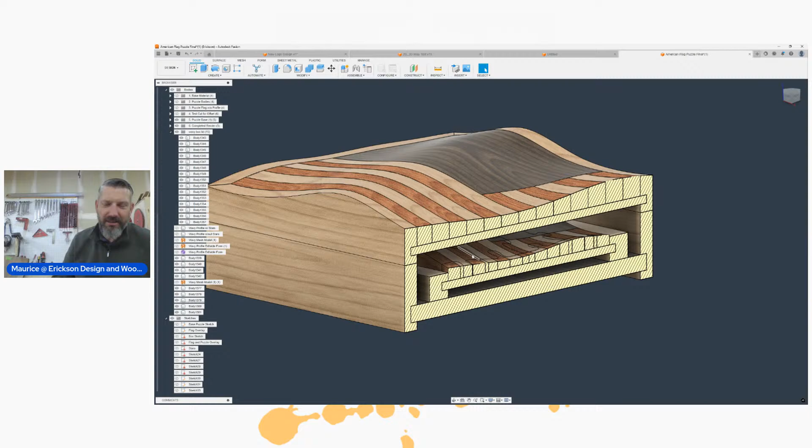But since I blew it up, right, I sized it bigger, the waves aren't dimensional anymore compared to what's on that puzzle piece. And like it's different. It still looks great. And I would probably just keep it because there's some pretty big crevices here that look pretty good.

Another thing is, how would I cut the top of this box off? When I put it in my table saw, I'm gonna have to cut off of this edge, right? Because I don't have a flat surface anymore here. Those are the type of things that I really have to think about. Whatever I'm doing, is it really achievable through the constraints that I have in the workspace? Sometimes I'll design something that is just completely impossible or outside the realm of capable for my garage to cut.

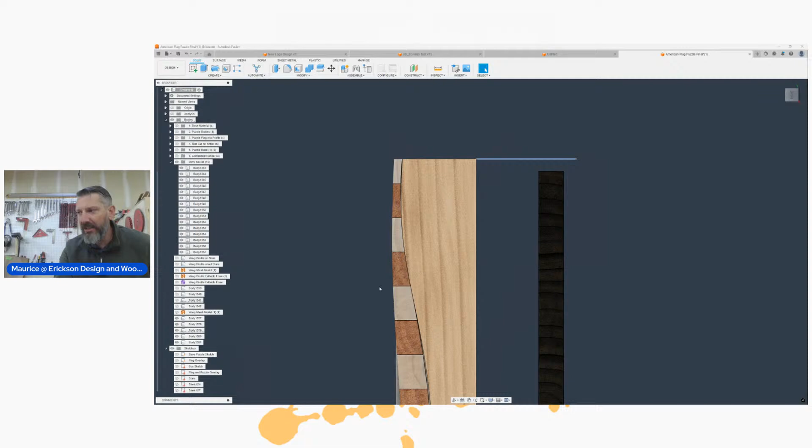So let me get rid of this section analysis. Yeah, I would have to cut from this side, and I would have to cut this box. So when I would set my fence up, I would leave 2 inches and then cut off at this edge. Another thing that we didn't account for, and that's why I left that 0.25 distance between, let me hide this. Let's hide this. Whoop. Yeah. So what I'm trying to say here, oh, come on.

It gets me all the time because when I design, I'm doing exact dimensions, and then there's whatever material I'm losing during the process of making it. It happens. So, but yeah, it does look good. And say for some reason now, I want to make this box just a little bit thicker, right? As far as distance wise, I don't like this space.

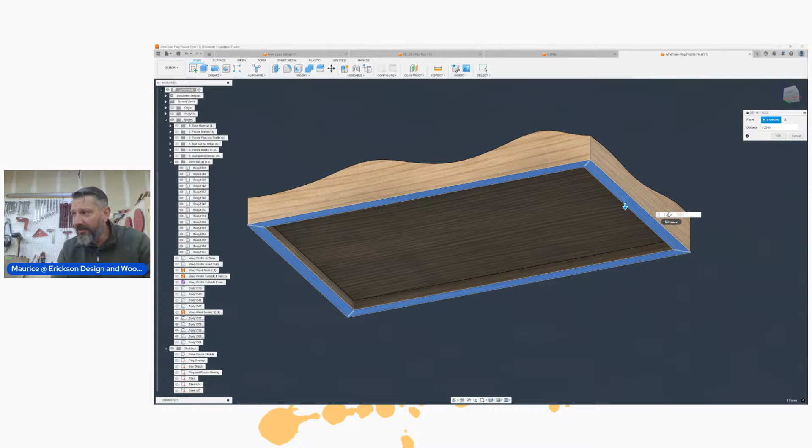I just go to the push pull and say I want to add, let's add another 1/4 of an inch. 0.25, right? That gives me more meat here on the top of that lid. And now all I have to do is just move this up 0.25, and I'm back where I started for where I'm technically at with the bottom of the box. So it's still there, still crunched down.

So now I can really start playing with the overall dimensions. And at the end of the day, I know exactly how much material is being removed and how much material I need to start with. So the basic sketches that I'm using are just getting me to a starting point, and then I'm sculpting everything else with extruding, pushing and pulling these sides. If I wanted to make this thing larger, like with a 0.75 thickness material, I can do that here.

I'm not going to lose anything. So I can push this another quarter of an inch out, and it will give me that dimension that I need to cut to when I get into the garage. So I really liked the modeling aspect of this, and it will give me the exact dimensions to get in and work with the physical material.

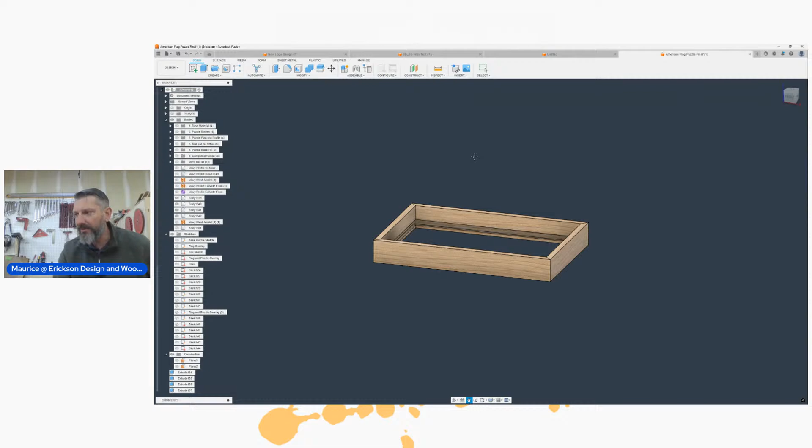But yeah, so I'm going to probably make this pretty soon. Probably late February is when I'll make that. Let me dump these in here, and then we'll just take this out. I'm going to bring this back in. So yeah, that's basically how I work through the design process.

And the original idea could change really, really fast if I see something in here that I really like and I want to account for. You know, that could take me into a completely different direction of the final outcome. That was the exact same thing for this design. If you guys remember last week, this was a square that almost looked like a wavy flag. And that was driving me crazy when I was going through everything. And then just a simple turn changed basically everything.

And then that dictated where these honeycombs go. There's a whole laundry list, and it's almost in sequence as you start visualizing what you're trying to make. It's a huge feature in Fusion 360 to really dial down what you want to make, and then everything that it takes to do that. All right. So I'm digging it. I like it.

You can't tell, maybe just a little bit here. This stripe is pretty small compared to the rest of them. I would probably relook at that again. But when you look at it, the thing is in there, you can't tell that this is non-dimensional from the regulation. So

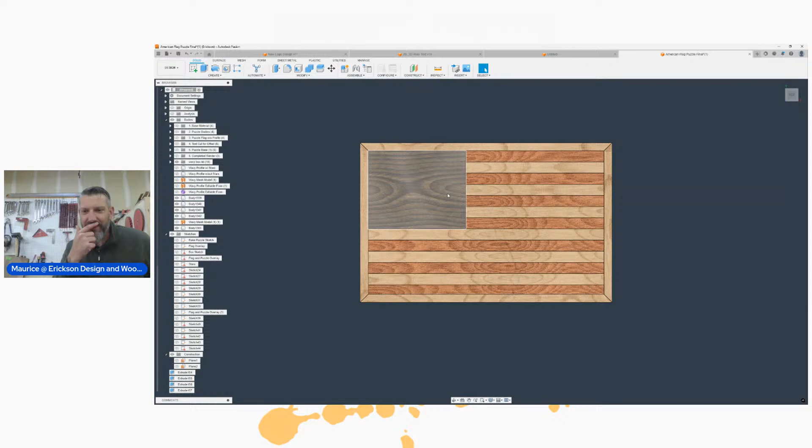Let's see, Brooks, price point wise, volume versus enhanced quality. Yeah. Yep. I could choose lesser value of material to keep the cost low. Sometimes that's an option for a customer that definitely wants this design, but it's just outside their budget. So can you work with, I wouldn't say pine, but something that's still a hardwood but doesn't cost as much. Cherry, that price point is actually not that bad. So I could make these stripes cherry, and it would still give that cool effect of contrast.

I could choose not to use curly maple and use maple. That will cut the cost. The union is kind of hard to get around because it's a unique color. But what I won't do, and this is just my personal opinion, I won't use stain to get it to a different color. I will try to find the hardwood that would get me there. And then same way with the outside of this box. I could use maple instead of big leaf maple. But again, like you see it, it's right there. If I want it to look unique and different, the materials really dictate the final outcome.

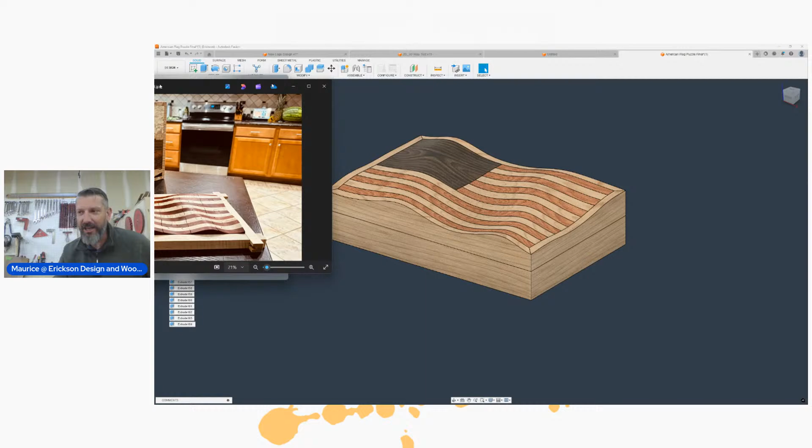And the box on this was extraordinary. The materials demanded attention when you looked at it because you were looking at all this deviation and grain structure and the burls and how it's swirling, and then the contrasting veneers that I used and the color points and how it created that depth. But the outside of this box, that maple, it was extremely figured and it looked really, really good. And it flowed. It can get the cost down, but it's something that I struggle with because at the end of the day, it increases the price significantly. It's just something you got to take into effect.

All right. So that's what it's going to look like. And that's kind of how I walk through the design flow to get to an end state. And who knows? I could look at this and tomorrow I could be like, man, I should go a different direction and do something different. But all my dimensions are here. I can walk into the garage right now and find the material that could meet these dimensions of this box and knock it out. And really, it's completing the box and then cutting this profile, and I'm good to go.

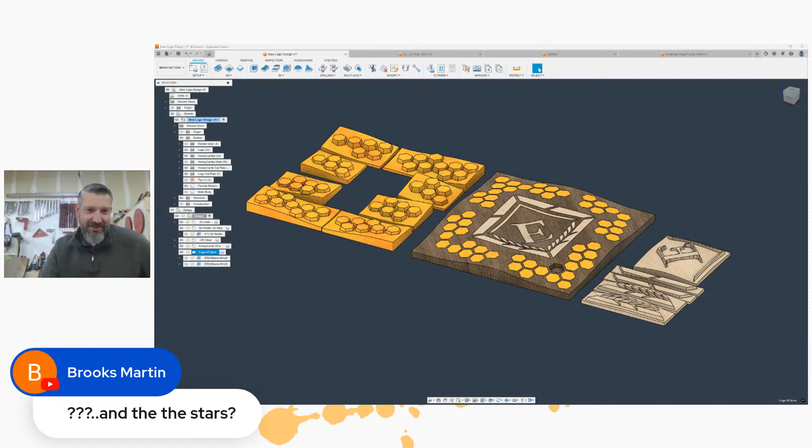Yeah, I still need to cut the stars in. I was kind of skirting that, whether I was going to do that during the live stream. But what I have, and I can just bring this up really quickly, is I have the drawings for the stars that I can manipulate and bring over and then scale it to do the stars.

And what's interesting about this, and let me pull a cam up to show this. When I do the V-carve on this, the toolpath generation is constrained within this boundary, and it follows it. So I don't have to really do anything. All I got to do is position this drawing over this, and I'm good to go into my manufacture portion and start cutting that out. But yeah, I still have to do the stars.

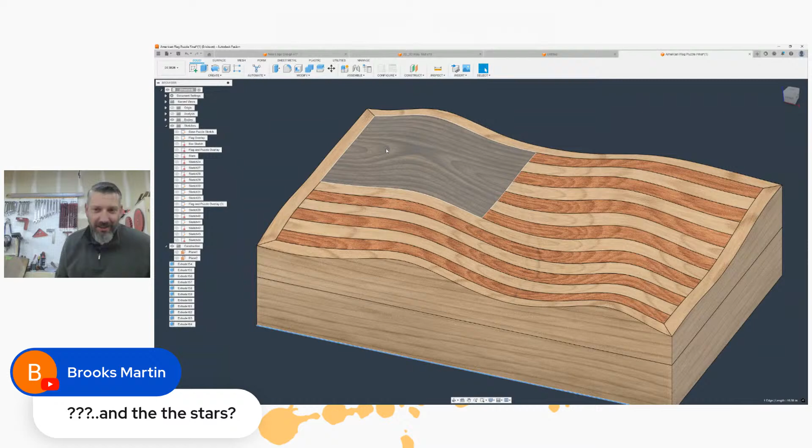I've seen where people don't do the stars, and it still looks super awesome. I would still V-carve the stars into this. And maybe, since I figured out how to do the plugs for the 3D V-carve, this would probably be a perfect opportunity to program a deep V-carve inlay and V-carve those stars into it. Inlay them in. Probably, Brooks, you talked me into it. Yep, it's happening. So I'm going to make a note of that when I come back in.

Yep. Thanks, Brooks. I got another 2 hours of trying to program that in. But it's worth it, right? So again, to do that takes time, and that increases the amount of machine time, material now. That's impacted by the price now. So if the price point doesn't justify doing V-carve inlays on a 3D surface, got to take that into effect, and then add that to the price for whatever you're trying to sell it for.

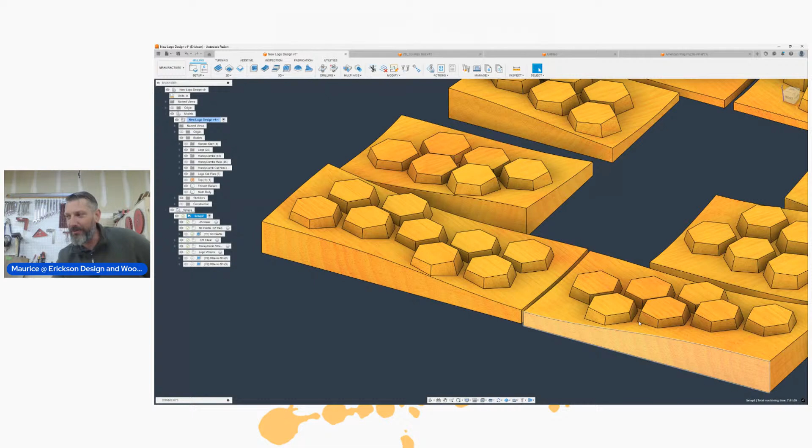So, man, this is the second week, Brooks, that you've talked me into using material designing that I originally didn't think about. But so to go back here, remember last week we were talking about the material for this. So I inventoried all of my Osage orange, and it's so cracked, and there's so many inclusions in this stuff. I can't use it. I was doing all the math and what it would take for the material costs to do this, and the amount of Osage orange that I do have, I don't have enough.

So I'm probably going to go back to cherry, which is still good, but cherry is really hard to machine, and it just has some issues with it as far as chipping and all that. But man, you really sold me on the Osage orange. It's too checked to where I can't get enough material out of that thing. And Osage orange here is really hard to get my hands on. I can't just go to a wood store and get it. I was lucky to find that stuff. But anyways,